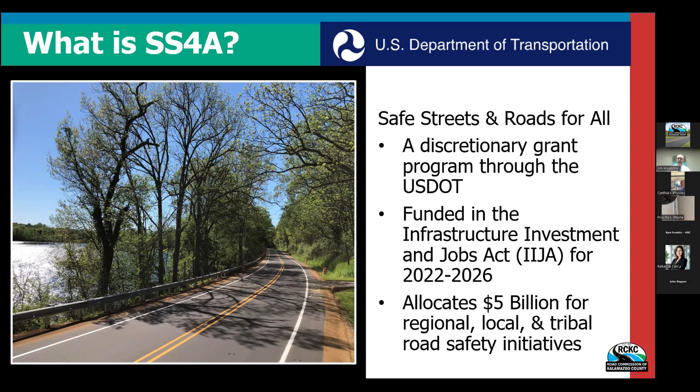So continuing on, the SS4A supports the goal of Vision Zero roadway deaths using a safe systems approach. The grant covers studies, planning and demonstration, and implementation projects. It currently has awarded $2.9 billion, and out of that, $144 million has gone to Michigan.

The Transportation Safety Action Plan. So this was a plan that the Road Commission developed. It is a safety plan for all roadway users. It was data-driven, it is collaborative, and the goal is to get to zero fatalities and serious injuries.

This report was performed a couple years back, and it has a mix of findings. For instance, we found that the Road Commission typically gets about 1,700 crashes per year, and about 15 of those per year are fatal. We also found that the total crashes in the county are fewer than the statewide average, and they're declining, which is a win. However, we also found that fatalities and serious crashes are more than the statewide average, and they're increasing, which is a problem.

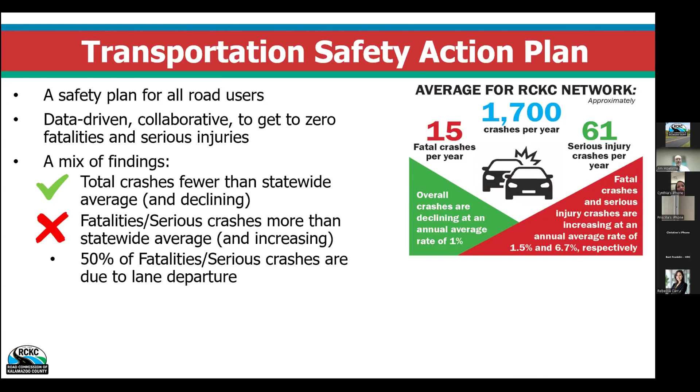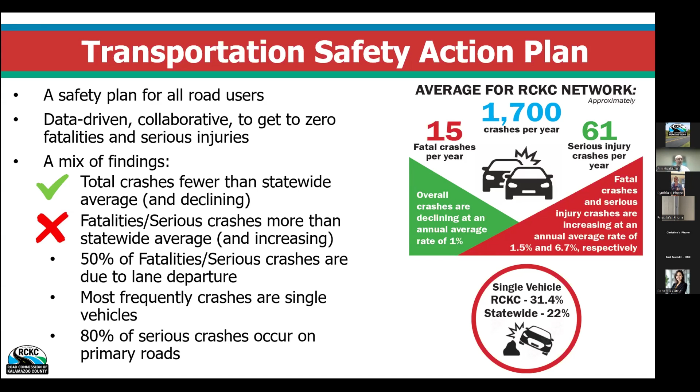Additionally, we found that 50% of the fatalities and serious crashes are due to lane departure - people leaving the lane, crossing the center line, or leaving the lane and leaving the roadway. We also found that frequently crashes are single vehicles, so not necessarily an accident between two vehicles, but perhaps somebody running off the road and hitting something. We have about 31% of our accidents are single vehicles. The statewide average is 22%, so we're higher than normal. And 80% of the crashes on our roadways that are serious tend to occur on primary roads, which are those that are more traveled - they have more traffic on them, they're busier, and I guess that kind of makes sense for the most part.

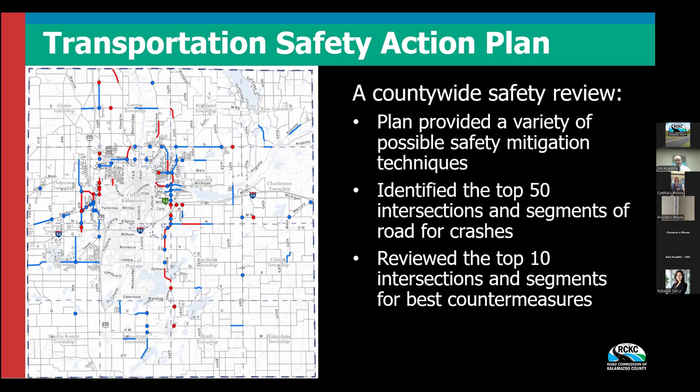So with that action plan, the plan also provided a variety of safety mitigation techniques. It also identified the top 50 intersections and road segments for crashes in the county, or the high crash locations. Of these, the top 10 intersections and segments were reviewed and looked at to determine the best countermeasures to prevent crashes. So we did a little bit of a deep dive into those top 10.

As part of the action plan, we also sought and received public feedback. We received 324 survey responses and 184 location-specific concerns. So we had a mapping tool, and people were able to pin or drop in a concern at a location. Themes from this public feedback were congestion, delineation, speeding, lack of shoulders on the roadway, signals, visibility, and non-motorized. Most respondents felt that road commission roads are fairly safe. And here you can kind of see a little word diagram of the typical terms that were coming up from the public.

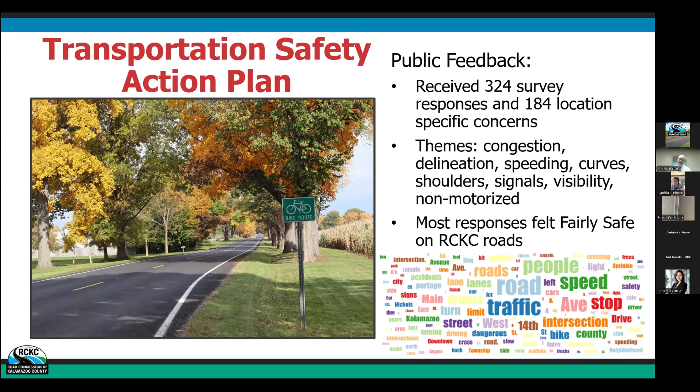So the Road Commission then proceeded to put forward a grant application. We submitted in May of 2024 for USDOT consideration. We requested $25 million in SS4A grant funds. This was supported by Representative Bill Huizenga and also by the Kalamazoo Bike Club.

As far as the Road Commission's project that we submitted for this funding, it was really focused on those lane departure crashes, which again are the most frequent for us and the most severe. It featured low cost, high impact countermeasures, including centerline and shoulder rumble strips, providing adequate clear zone, shoulder widening, edge lines, and improved curve signage.

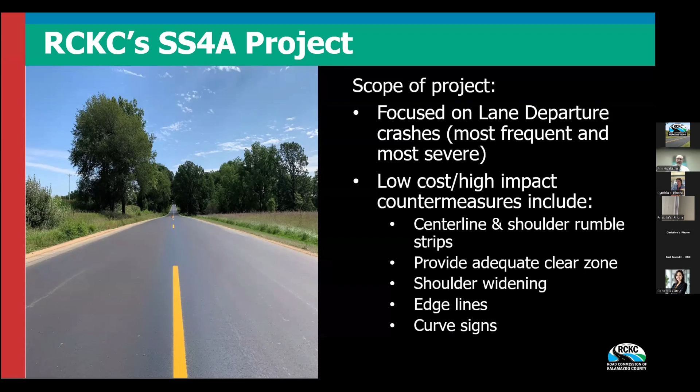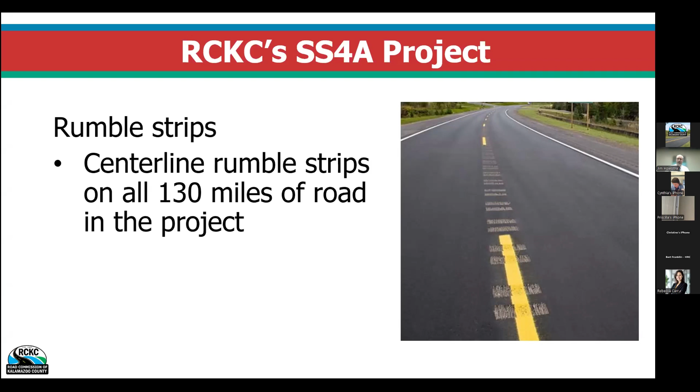So we're going to dive into those different techniques of the project. Rumble strips, for instance, we proposed centerline rumble strips on all 130 miles of the roads within the project. We also proposed shoulder rumble strips installed on 74 miles of the roads within the project. Those roads that get the shoulder rumble strips would not be the ones in our non-motorized master plan, since we took into consideration non-motorized traffic and will not install rumble strips on any roads listed in that plan.

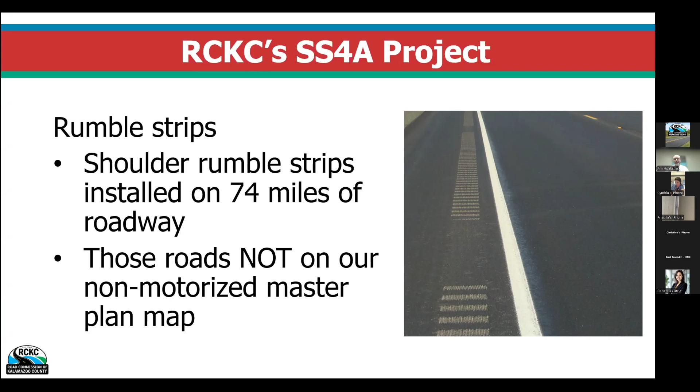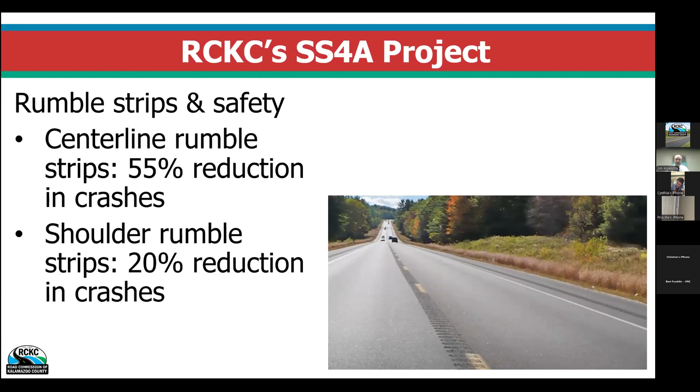The impact of these, centerline rumble strips have typically shown a 55% reduction in crashes. These figures are according to the state. Shoulder rumble strips result in usually about a 20% reduction in crashes.

RCKC has had some experience with rumble strips in the past. We've done 3 projects, 2 in 2015 and 1 in 2022 - Sprinkle Road, 12th Street, and another section of Sprinkle Road. We found a significant reduction in crashes from these treatments. The charts you see here show the fatal and serious injury crashes per year before and after on the left side, and the total crashes per year before and after on the right side.

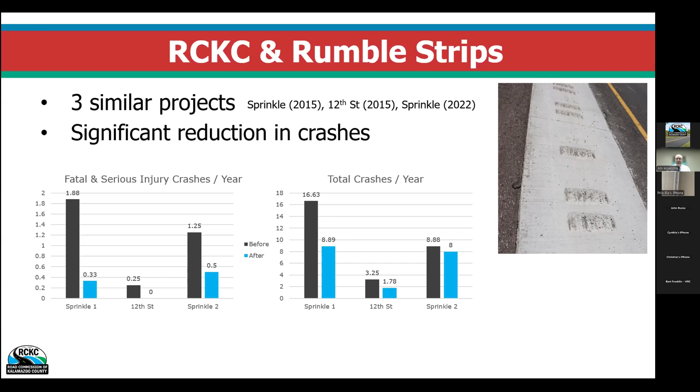What we see here is we've significantly cut the fatal and serious injury crashes per year on all 3 projects. In one case we've had zero since the project. We've also seen the total crashes per year have dropped - in some cases significantly, in others a little less, but nonetheless they are dropping because of these treatments. This means we have prevented 17.7 fatalities and serious injuries in the years since these projects on these 3 roads, and prevented roughly 84 total crashes on these projects since they were undertaken.

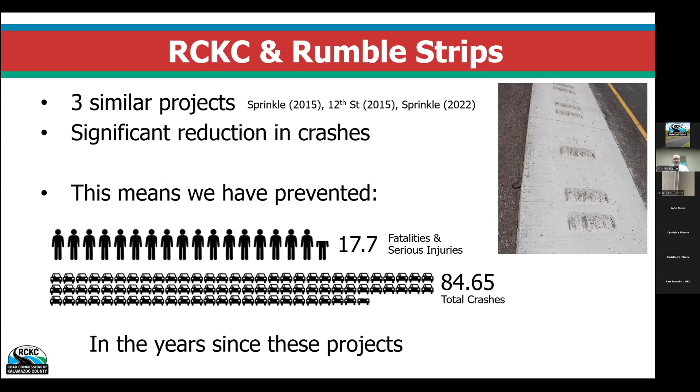Another aspect of this project is clear zone improvements, and I know that can be a tricky term. So to start with clear zone - what is it? It's the area beyond the traveled lane that is safe for an errant vehicle to get off the road.

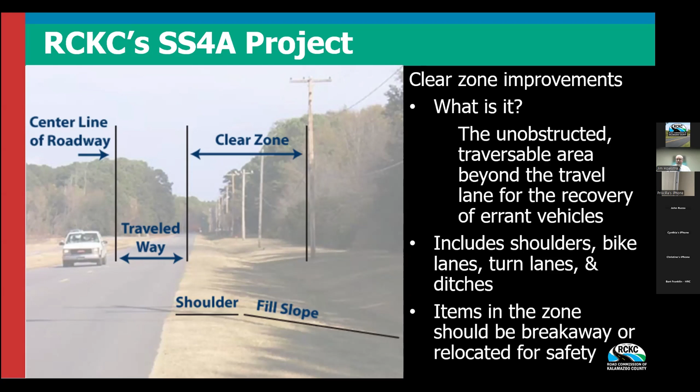So should somebody fall asleep at the wheel or experience some kind of vehicle malfunction, they would go off the roadway into the clear zone, which generally includes shoulders, turn lanes, and ditches. Items in this area are generally breakaway safe or relocated for safety purposes, so we try not to put anything structural or embedded in concrete within the clear zone. For this project, clear zone improvements mean tree removal, culvert extensions, roadside flattening, and potentially other fixed object removals.

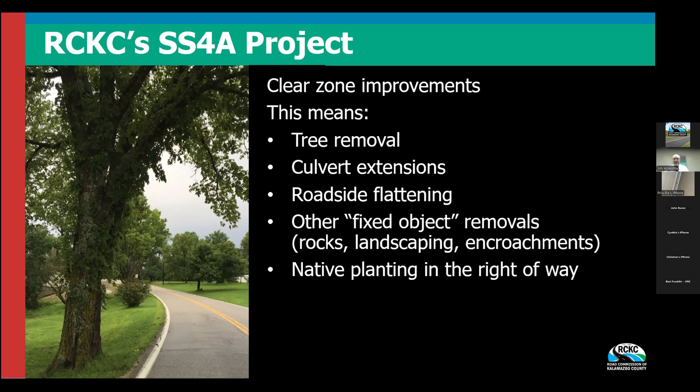This could include rock or should somebody have another encroachment - I don't quite know what that means, but if we find something like a large chunk of concrete, that may have to go as well. We will also be native planting in the right of way after we remove these things from the clear zone.

Additional benefits of these tree removals are probably the most impactful to residents. Removing the trees is, first of all, an improvement for safety, but it also improves the visibility of signs, signals, and traffic on the street. So if you're pulling up to a stop sign, you can see further down the road. It also improves emergency response and allows for roadways to be cleared of tree debris or snow. It reduces wildlife hazards too - not having trees and brush that close to the road could keep deer and small animals further away from the road.

Another positive impact we've considered is that the monarch butterfly appears to be threatened now, so by improving these roadside habitats, removing trees, and planting them with native species like milkweed, we hope to draw those monarch butterflies and improve their habitat.

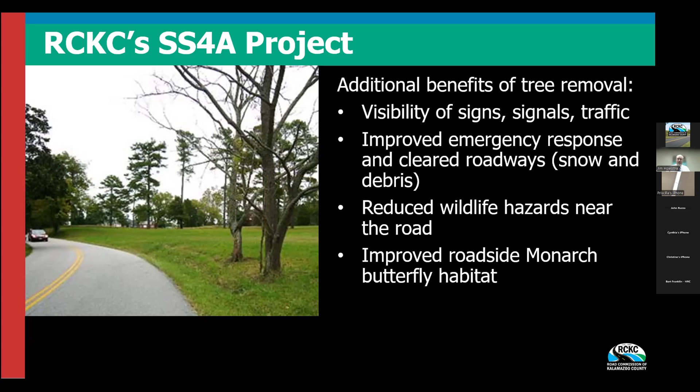As I said, clear zone improvements are primarily for safety. Removing these objects from the roadway or clear zone is generally associated with a 75% reduction in crashes. Increasing the clear zone also has a reduction in crashes of 22%. Flattening slopes, making ditches or drop-offs along the road less severe, tends to result in a 15% reduction. Culvert extensions, so errant vehicles don't hit a culvert, also have a reduction in crashes associated with them. And improved sight distance at intersections has a reduction in crashes of over 48%.

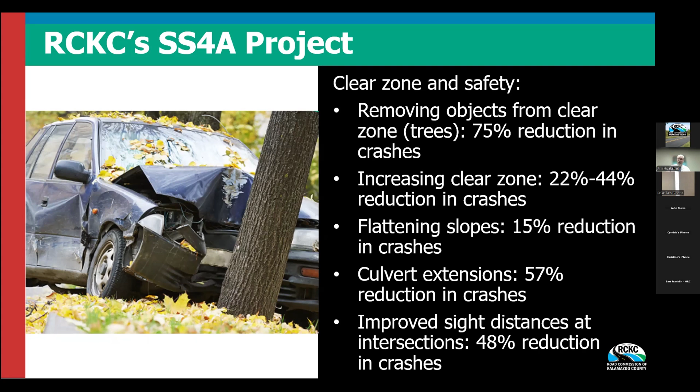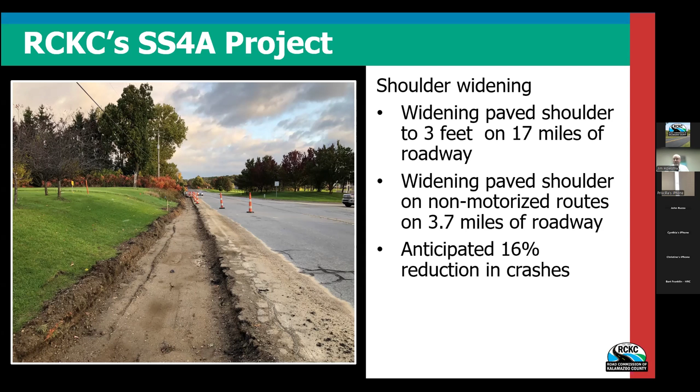Another item in the project is shoulder widening. We plan to widen 17 miles of roadway by putting 3 feet of paved shoulder on them. We also anticipate widening 3.7 miles of non-motorized roadway to provide a safe area for bikes and non-motorized users. With these, we anticipate a 16% reduction in crashes.

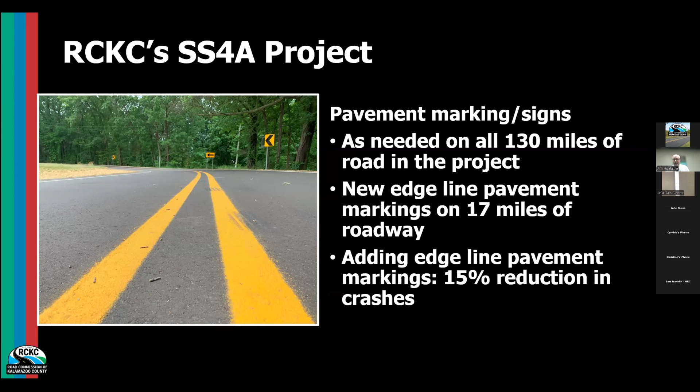We also talked briefly about pavement markings and signs. This will happen on all 130 miles of the project. New edgeline pavement markings will be on 17 miles, where we don't currently have the width to put the white line on the outside. We'll be putting that in and widening the road for 17 miles. Adding these edgeline pavement markings tends to result in a 15% reduction in crashes.

In summary, this project does address 28 of the top 50 high crash areas in the county. It involves 29.3% of our primary road network, a little bit more than a quarter of our primary roads in this county. These locations are all shovel ready, so we didn't have to acquire any right-of-way easements or anything like that.

It's going to be on 130 miles of rural roadway. That's 17 miles of widening, 54 miles of paving, so a good number of these will be new pavement. There will be 130 miles of rumble strips, pavement markings, and signs, and 6 left turn lanes added. We anticipate this project will be complete in 5 years. That is the grant parameters.

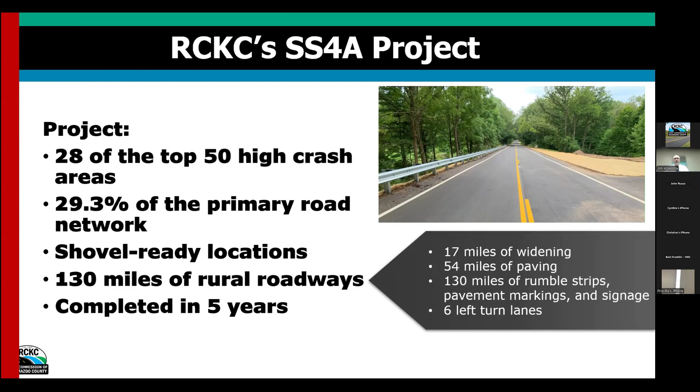This map here, I believe, is posted to our website. If not, it will be shortly. This is the SS4A project, and it does show here color-coded what the different treatments are.

You can see the red would be a reconstruction, where we are taking the road all the way down to gravel, reconstructing, and then putting in the shoulder, the rumble strips, as well as the clear zone improvements. The orange would be a resurfacing job, but widening the road, and again the rumble strips and clear zone improvements. The blue would be a paving job to facilitate the rumble strips, clear zone improvements, pavement markings and signs. The green is where we are simply looking at cutting the trees. The pavement will accept the rumble strips as is, and we will be doing pavement marking and signs. The purple dots represent the potential turn lanes.

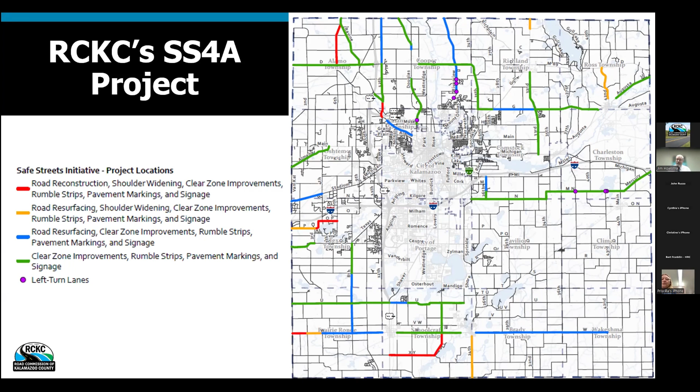Current progress of this project: we have a website up, and we're putting everything there as we get it. This website is your first stop shop for any information on this project. Maps, presentations like this, flyers, news releases, media, that kind of thing, will all be posted to this website. Feel free to go there.

We're also working on federal environmental clearances right now. We are doing tree surveys — I expect a number of you have seen the paint marks on the trees. We are also working through finalizing the FHWA, or Federal Highway agreement for this project. Before we can do any further work, shovels in the ground, we need to have the agreement in place.

I'm going to walk through what to expect for the next 5 years. You may not be able to see the map, but in 2025 we expect to send out 75 miles of roadway for tree letter notifications, letting folks know what's coming for their trees so they can respond saying if they want the wood or if they want us to take it away.

We'll also be developing design and specifications for bids. And in the fall, we're anticipating about 35 miles of tree removal, which equates to about 1,500 trees.

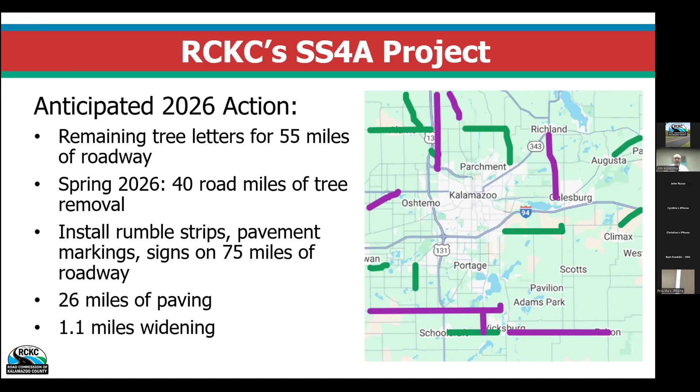In 2027, we expect 29 miles of road for tree removal. We anticipate 29 miles of road both for the rumble strips, the pavement markings and signs, as well as for paving. Of those 29 miles, 8.4 will be widening.

The map on the side does show these by year. This map is the same as what's on our website, so you can filter based upon the year if you'd like, and it's all color-coded in that regard.

In 2028, we anticipate 16 miles of road for tree removal, 16 miles of road for rumble strips, signs and markings. 8.3 miles of that will be newly paved roads, and 2 miles of that will be widening.

And then lastly, in 2029, this will be the final year of the project. We expect 9 miles of road for tree removal, paint, signs, paving, and widening. All of those things will happen for those 9 miles of road.

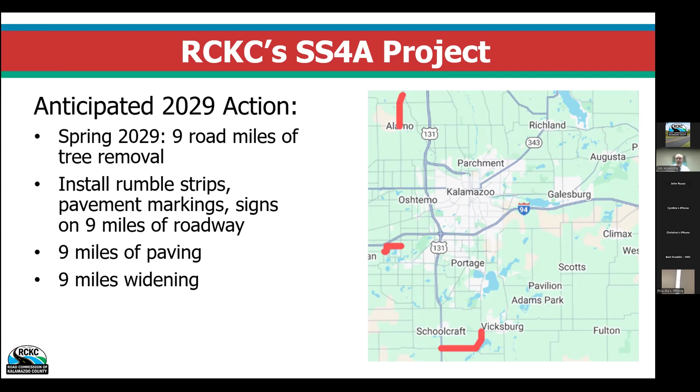The website is the first stop shop for staying up to date with this project. We have the project locations and an interactive map, breaking it out by the years. I believe we also specify the different treatments and a lot more information than I can cover tonight. We also talk about the current progress and updates.

Any new updates will be posted there. We have our safety action plan posted there as well, should anybody desire to see that. We have presentations like this, and meeting information.

There will be future meetings as we get into this project. So those jobs that are very invasive to residents, may involve a detour, something like that, those we will have further meetings for. We will keep you informed as those proceed.

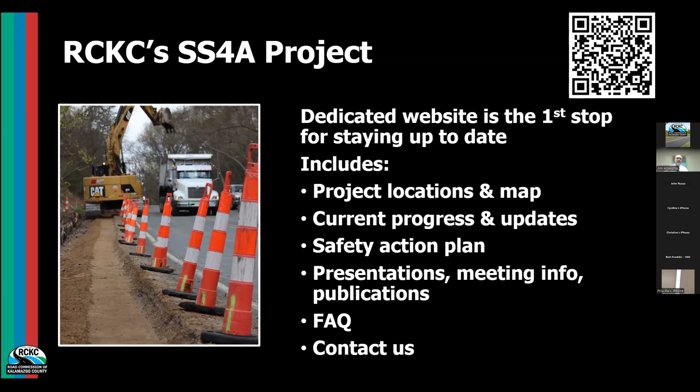We also have our FAQ, or frequently asked questions, on the website. And we also have a way for you to contact us should you have any concerns or questions. We'll go to that now.

So this here is what our website looks like. This is the SS4A tab. You can see along the top in the green bar, highlighted in red, is the area where you can click to go to the SS4A tab. As you can see here, we have all those items we talked about, the map, the progress, the action plan, frequently asked questions. It's all up here.

Now, should you have a question for us and you want to interact with us, provide feedback, or inquire about your road in particular, we do have this button at the top that says service requests. We would ask that you please submit all questions to that. That way we can log the questions, respond to you properly, look at your particular area of concern or area of questioning, and get you a proper answer.

We also have another way to get a hold of us, this contact us at the bottom. It'll take you to the same area, a service request system. You can submit your questions there and we will try to follow up with them in about 14 days.

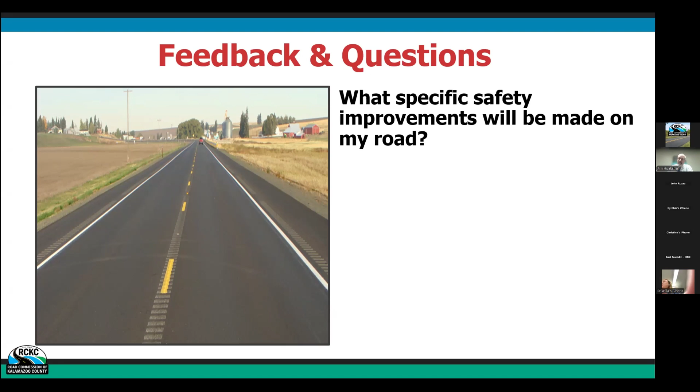Now we are going to go into a couple of the frequently asked questions, so I'll cover those here tonight. First of all, we've been asked, what specific safety improvements will be on my road? I know that's the question probably a lot of us have, since we're talking about 130 miles of road, but everybody probably wants to know what's going to happen in front of their house.

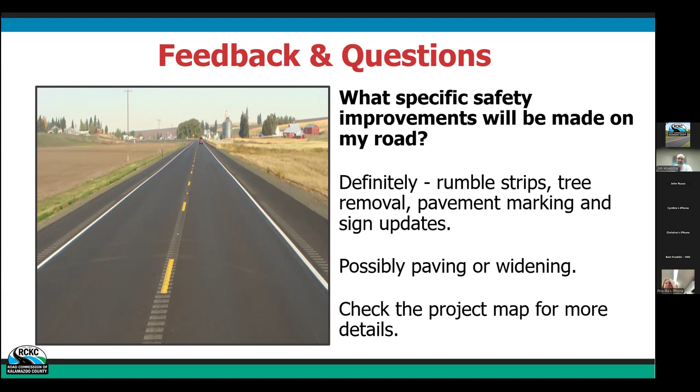I can definitely say that it will have rumble strips. I can say that it will have tree removal, pavement markings, and sign updates. Depending on your location, it may have paving and widening. That is where I would recommend that you check the map for details. Those roads will be called out and noted on the map.

So how are these roads selected for the project? Well, again, these roads were selected based upon that action plan that we put together a couple of years back, which was based upon crash history or crash rates and public feedback. These roads are generally rural in nature. They are primary roads carrying higher volumes, and they generally have higher speed.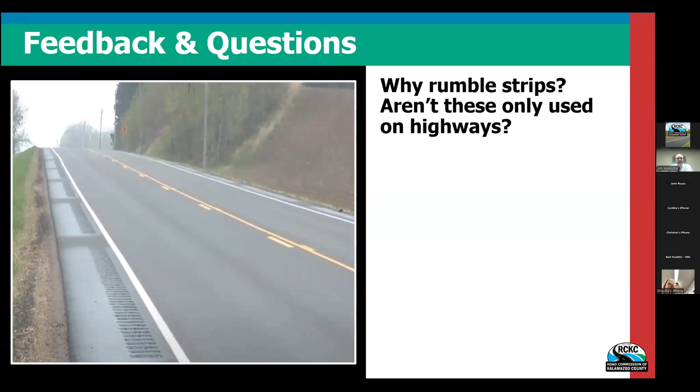So another question people might ask is, why rumble strips? Aren't these for use only on highways? Well, they are typically used on highways. You'll find them on I-94, 131, any of the M routes really will have them, but there has been success using them on two-lane roads, and we've seen that here at the Road Commission as well. Many states and counties are seeing the benefits. They are very highly effective and they are low cost.

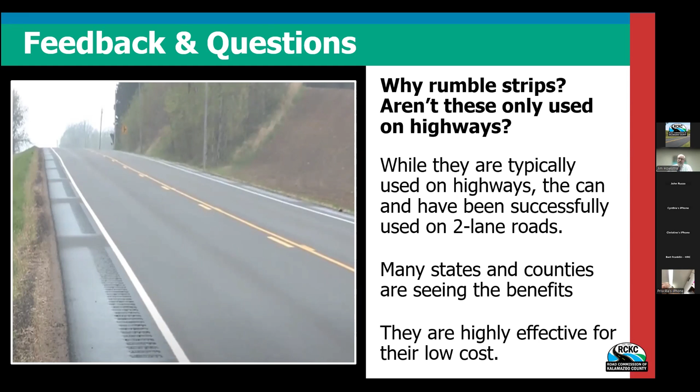So how will this project affect road access? In terms of getting to your house, to your driveway, what should you expect? Well, it will vary. Most work will require at least a temporary lane or shoulder closure. Some projects, however, if we're going to be paving the road, they may need to be closed and detoured. So depending on which road you're on and what the treatment is, it could be a different situation. There are 130 miles in this project, so it could be a vast array of different treatments and different impacts to you. Please watch our project website for further updates and details.

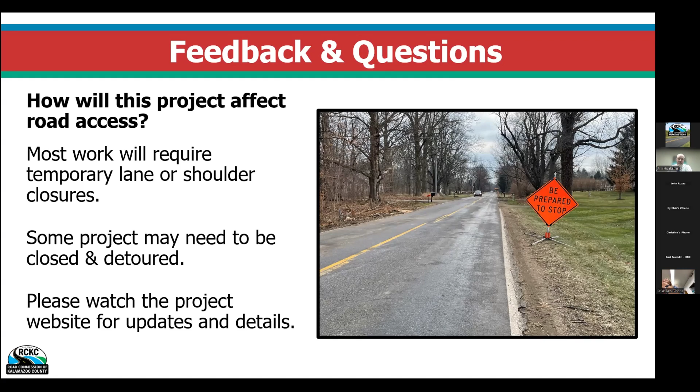Another question we've gotten is, how will the rumble strips affect cyclists? We understand that putting rumble strips on the outside edge of the road where bikes typically ride will result in a rough and uncomfortable, probably unsafe, riding surface. We are committed to the safety of all users, so we will not install shoulder rumble strips on any non-motorized route on our master plan. We will still install them on the center lines to prevent head-on crashes or vehicles veering into an opposing lane, but not in the paved shoulder area where bikes generally ride.

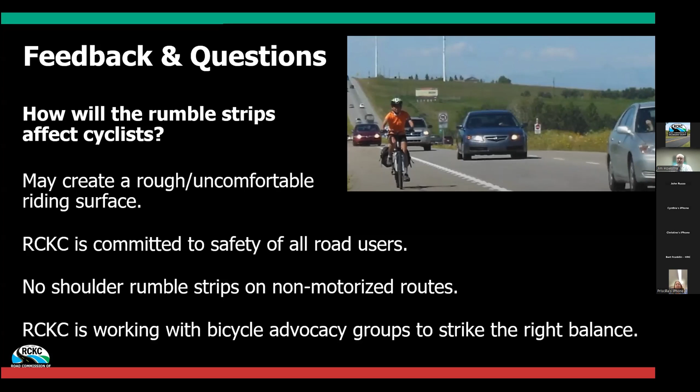We are also working with our local bike advocacy groups to strike the right balance. We understand road safety is important and preventing deaths is very important. We also understand non-motorized users are important, and we're trying to strike the right balance between the different facets of this project.

What about the noise from the rumble strips? Rumble strips do create noise, and noise and vibration are good for drivers in this case - that's the purpose. They're there to wake up a sleeping driver or get somebody to pay attention to where they're going and put down the phone while driving.

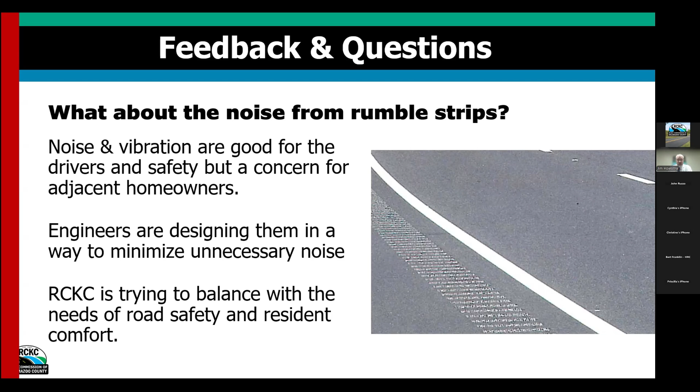However, noise can be a concern for homeowners adjacent to the road. That being said, we are working on ways to minimize unnecessary noise - whether that means making the rumble strips not as deep, a little narrower, or pushing them off the white line. Any of those things we are looking into, trying to strike the right balance between road safety and resident comfort. We understand that concern, we are working through it, and design will take it into consideration.

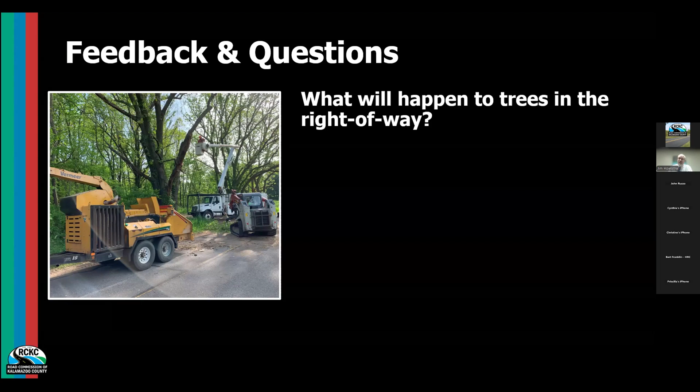Another question: what will happen to trees in the right-of-way? We touched on this already. Trees will be cut - they are considered a fixed object, they don't move for cars. Since we're trying to prevent serious accidents with hard objects in the clear zone, all trees will be removed within the right-of-way, so from 33 feet from the center line of the road.

The RCKC is at this time not replacing trees. Ultimately, this project is about saving lives. We understand the trees are important - they provide benefit to residents, nature, everybody - but we are trying to strike that balance between roadway safety and the trees.

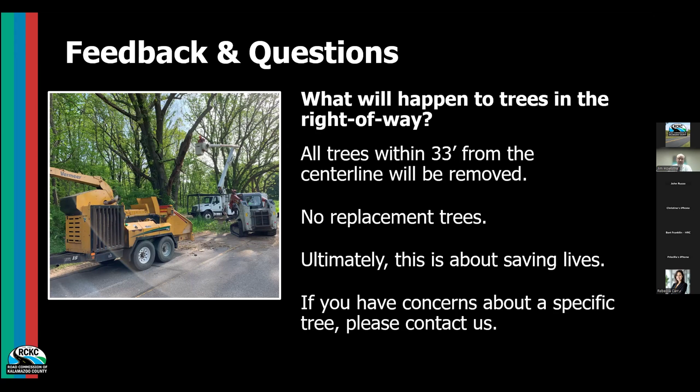If you have a specific concern about a tree, one or two in particular, or further questions about trees, go back to our website and share those thoughts and concerns with us - we can talk to you about it. If there's a tree at the back edge of the right-of-way, maybe we can look at it remaining. We can look at that specifically, but if you have concerns, let us know.

How will this improvement project affect the environment? Tree removals will be done in accordance with best practices to minimize harm to the ecosystem, so we'll cut trees in the tree cutting season to avoid affecting bats or spreading tree diseases. Typically when we pave a road we recycle pavement, which promotes further sustainability.

The other thing I want to share is that we are using native seeding - seeding for wildflowers and native plants. We're not looking to bring in invasives or anything like that; we're going to use local native seeding.